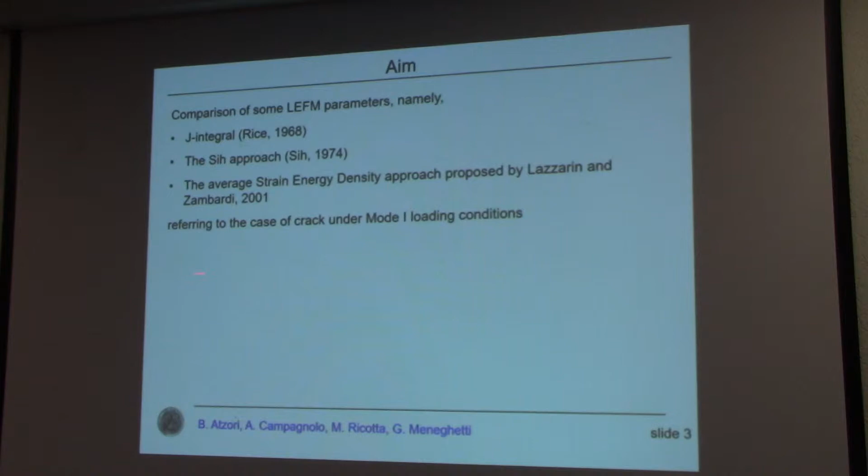Dr. Campagnolo. The aim of this work is the comparison of some linear elastic fracture mechanics parameters, namely the J integral proposed by Rice 1968, the Sih approach proposed by Sih 1974, and the average strain energy density approach proposed by Professor Lazzarin and Zambardi 2001, referring to the case of a crack loaded under mode 1 condition.

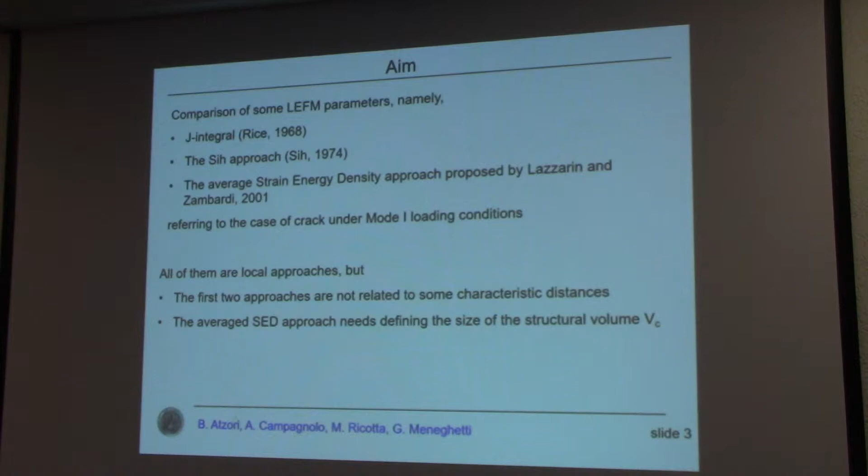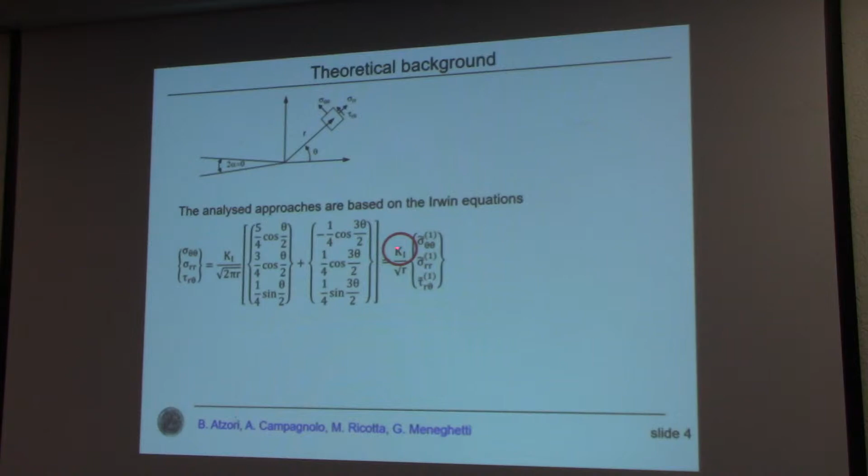All the approaches are local approaches, but the first two approaches are not strictly related to some characteristic dimension of the problem, while the last one, the average strain energy density approach, needs to define the size of the structural volume Vc. All the analyzed approaches are based on the Irwin equation, which describes the stress distribution close to the crack tip, taking advantage of the mode 1 stress intensity factor.

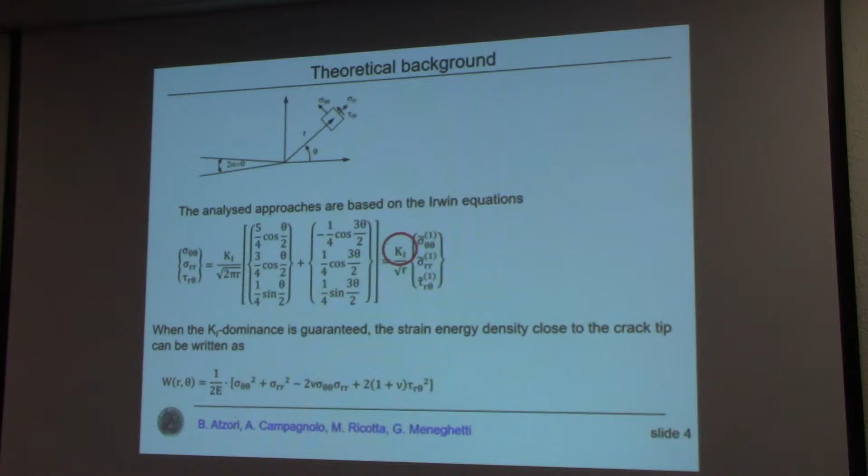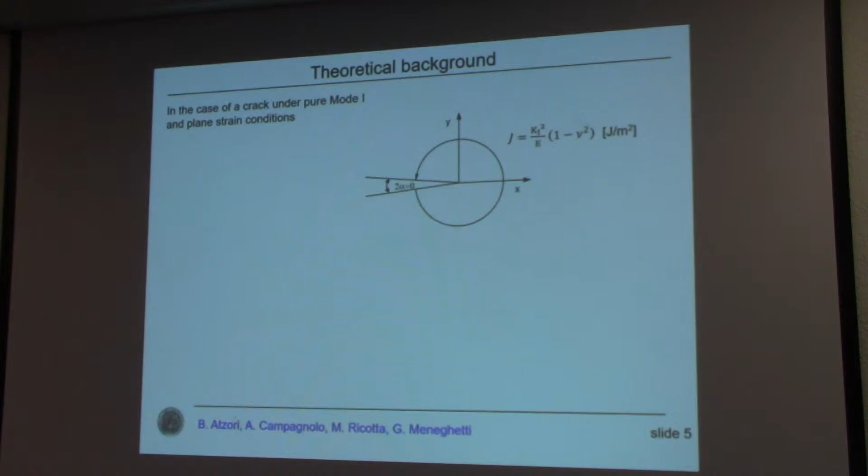When the K1 dominance is guaranteed, the strain energy density close to the crack tip can be written according to this simple equation. Everybody knows that in the case of a crack under pure mode 1 and plane strain condition, the J integral can be expressed in terms of the mode 1 stress intensity factor. The Sih parameter S can be thought of as the intensity of the strain energy field close to the crack tip. Therefore, along the bisector of this crack, that means theta equal to 0, the strain energy field is a function of the distance x having a singularity equal to -1.

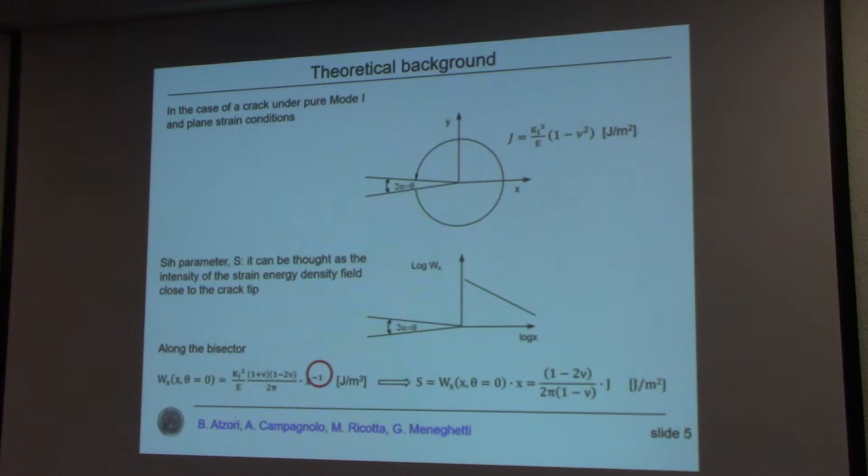And then simply multiplying the strain energy density by the distance, it is possible to evaluate the Sih parameter S as the intensity of the strain energy density field, and it is possible to express S as a function of the J integral for comparison purposes.

Finally, in 2001, Professor Lazzarin proposed as a suitable fatigue damage index the strain energy density averaged in a properly defined structural volume centered at the crack tip, having radius equal to R0. Therefore, in order to apply the average strain energy density approach, it is necessary to define the size of this structural volume. According to the approach proposed by Professor Lazzarin, R0 is thought of as a material property. How is it possible to evaluate R0?

The underlying concept is that the strain energy density averaged in a structural volume when the applied stress assures a threshold condition for a crack must be equal to the strain energy density evaluated in a plain specimen when the applied stress is equal to the fatigue limit of the material. Therefore, according to this assumption, it is possible to evaluate the size of the structural volume.

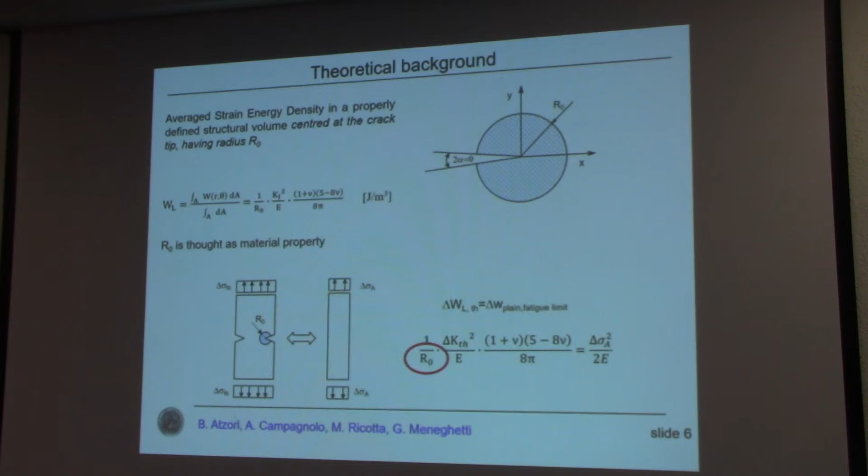In this paper, we have proposed a strain energy density factor L defined as the strain energy density averaged in the structural volume multiplied by the size of the structural volume. Therefore, L does not depend on the size of the structural volume. The name L was chosen in honor of Professor Lazzarin, who died 5 years ago, close to the EGF conference that was held in Catania.

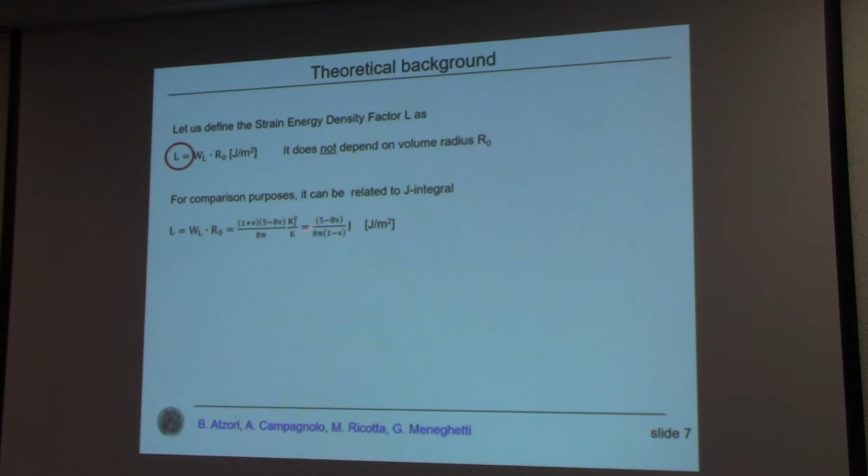For comparison purposes, the L parameter can also be expressed as a function of the J integral. And therefore, we have analyzed these three different parameters, the J integral, the S parameter, and the L parameter, that is an extension of the average strain energy density approach.

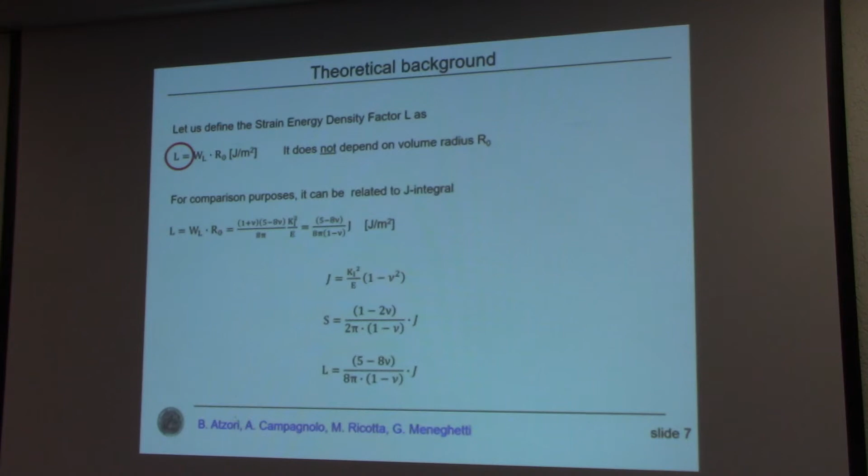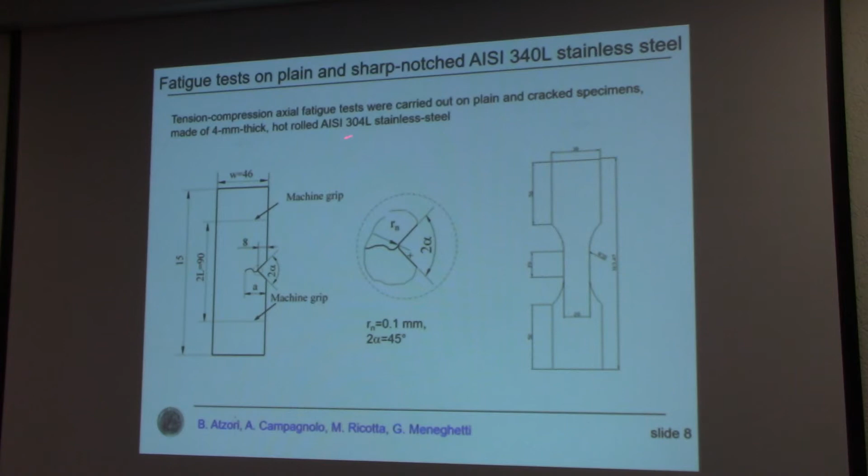Tension compression axial fatigue tests were carried out on plain and cracked specimens made of 4 mm thick hot-rolled AISI 304 low-carbon stainless steel. And you can see in this slide the fatigue curve obtained in the case of plain specimens, analyzed in terms of the range of applied stress amplitude. We can see that the fatigue limit is equal to 404 megapascal with a knee of the fatigue curve at about 160,000 cycles, as widely reported in literature for this kind of material.

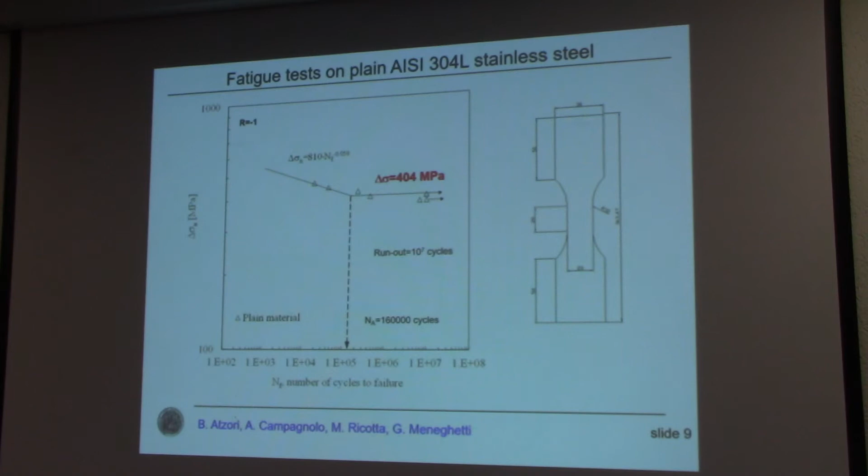Otherwise, if we analyze the fatigue curves obtained in the case of cracked specimens, in terms of the range of mode 1 stress intensity factor, we can see that the fatigue curve has a knee at about 10 to 8 cycles, with a threshold delta K equal to about 8.7 megapascal root of square meter. Therefore, it is possible to evaluate the size of the structural volume for this material, that was found equal to 0.126 millimeter.

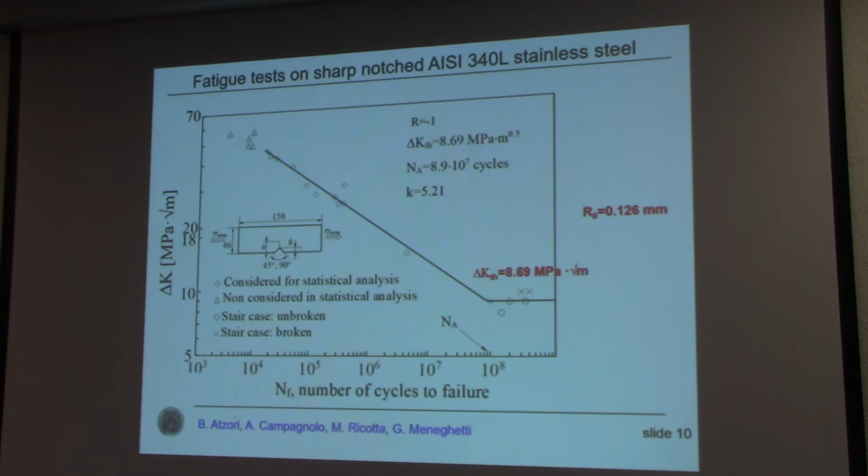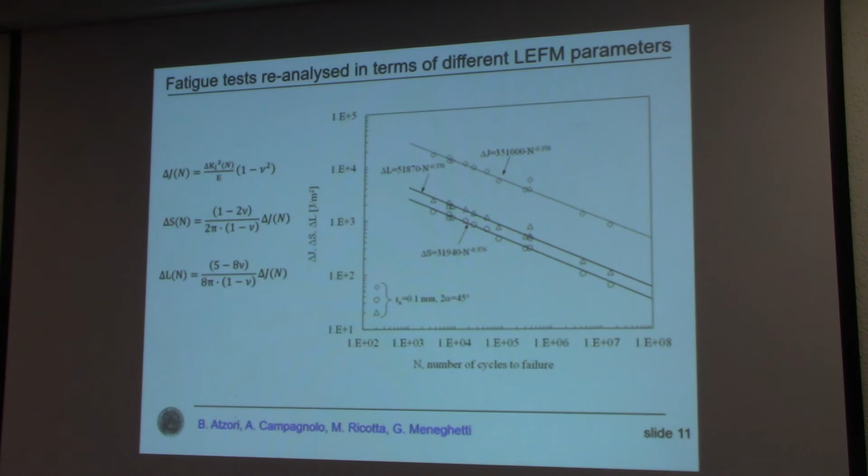All the fatigue results obtained in the case of cracked specimens were then reanalyzed in terms of the three different parameters: the range of J integral, the range of the S parameter, and the range of the L parameter. And you can see here that all three parameters are able to rationalize in a single scatter band all the fatigue results, and therefore all three parameters can be used for fatigue calculations.

We have analyzed the properties of the L parameter. Taking advantage of the established link between L and J integral, it is possible to calculate the L parameter using the automatic subroutines usually implemented in finite element codes. And secondly, the evaluation of L parameters can be performed by using relatively coarse meshes. In fact, when the ratio between the crack length and the element size is higher than 3, the L value stabilizes close to the average value, falling inside a plus minus 3% scatter band with respect to the average value.

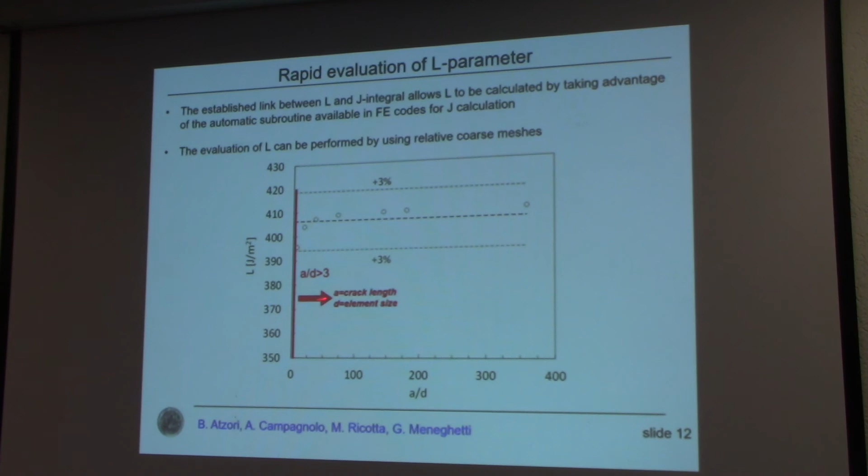The L parameter can be rapidly evaluated by using relatively coarse meshing, and then it can be adopted for structural integrity evaluation. And as with the J integral, of course, there are some limits. L depends on the radius, the path, when the crack opening angle is higher than 0 degrees. That, from a practical point of view, means when the crack opening angle is higher than 45 degrees.